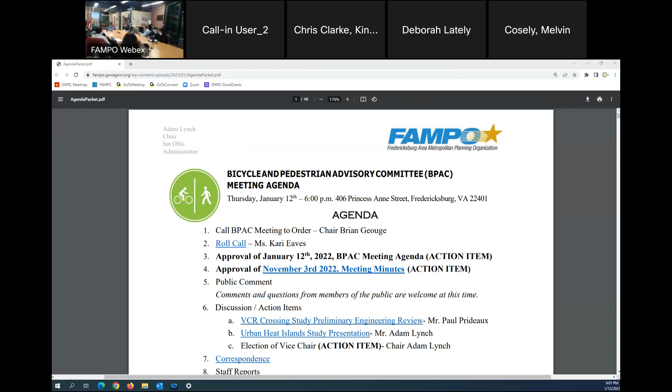Thank you, Brian. We have a token of our appreciation here on your way out. Thanks so much for doing your time as our chair. We'll miss you a lot, but glad to have Matthew here. This actually calls for a Kodak moment.

Get everybody else in the background. That won't be the only picture we get either. We need one with the certificate. I gotta get one. I can email this to you. Okay, thank you, please do. Put it on my face, please.

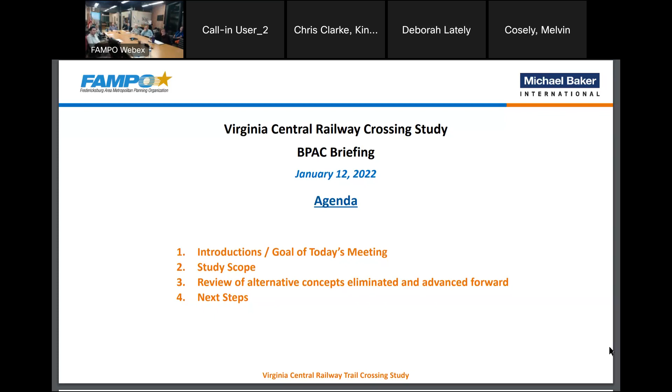So, Virginia Central Crossing Study. The goal of today's meeting - again, I work for a firm called Michael Baker International. We'll talk a little bit about the scope, just a slide or two. The really important part is review of alternative concepts, and then some next steps. Unless I hear any questions, I'm just going to keep going.

Just a little bit about the scope of work for those who haven't heard this already. It's a planning study - not final design, engineering, or construction. It's enough engineering, plan engineering is a cute word, to really get a handle on whether you can build it in 3 dimensions, and what kind of money we're talking about.

So for feasibility assessment, we looked at a number of alternatives at each of those 3 locations - we could go above, under, or other options. That's all in the rearview mirror now. Since then, working with the policy committee and the TAC, we have narrowed that down, but I'll talk a little bit about where we came from.

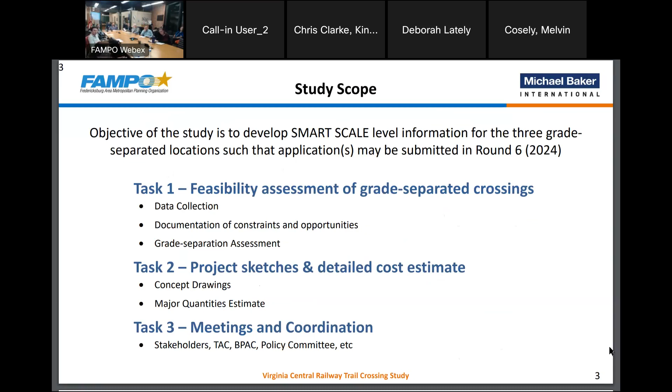We considered alternatives for each of those locations and picked a preferred option. The second goal, task 2, is to further develop those ideas - open the hood and figure out some things, but not enough detail that you could hand it to a contractor and say, build it. That's not the level of detail. And then here we are doing some meeting and coordination.

For example, at I-95 we looked at three things. We looked at maybe going over I-95 with an aerial crossing—those exist around the state and country, but you have to get up to them, and the lay of the land is quite below I-95 at this location, so it'd be a lot of getting up. So that was one option.

The second option was a tunnel under 95. A third option was using the box culvert—if you know what a box culvert is, it's made for drainage. There's this triple, massive box you can actually walk through. We did—we went out and walked through it and got a little splashing of water.

We thought about could we convert that to a pedestrian bike crossing? Converting the box culvert had too many issues, and the aerial crossing wasn't popular. So what you'll hear about tonight is the idea of tunneling—excavating, not an open cut, but boring under I-95.

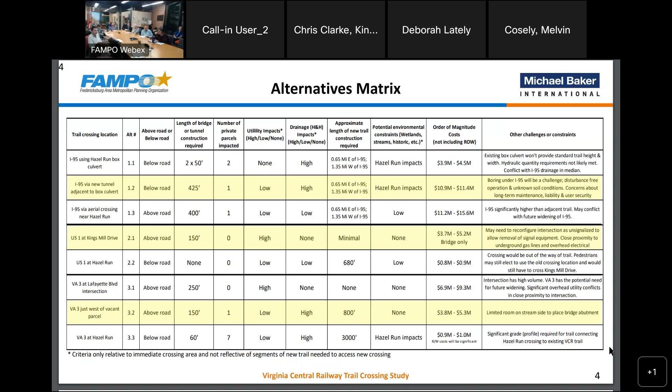So that's a lot of words, and no one wants words. Let's keep going—let's talk about 95 first.

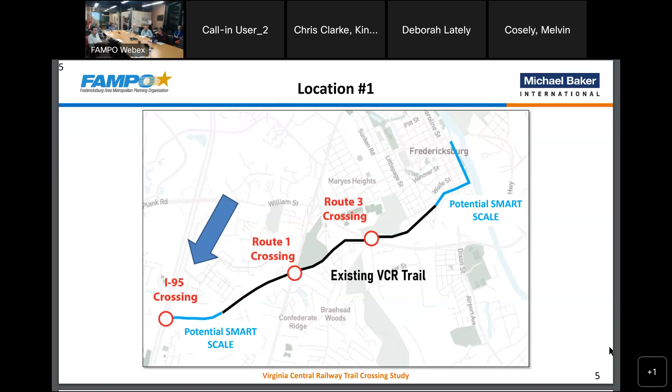Hey Paul, let me ask a question—often in these kinds of studies, one of the alternatives is to leave it as is, but your instructions took that off the table. That's a good point, that's like the no-build alternative. Yeah, in a typical environmental study you always have to have the no-build and carry it all the way through. This is a little more pointed—tell us what it would take. So you're right, my instructions were to go straight to that. That doesn't mean it's going to happen, it just means study these options. So we didn't spend any time investigating that, and this isn't really a study about demand—it's more an engineering study, like a three-dimensional 'can it fit, where do you put it, how does it work.' It's more of a practical question than a value question.

Question—maybe Kari can provide a little context. Was that applied for through a Smart Scale application? Yeah, the trail leading all the way up to the base of I-95 is part of that current application.

So yeah, there is an application to get to somewhere, but it's kind of a bridge to nowhere at this time. This ability to have a grade separated crossing becomes very important for that smart scale application to have value.

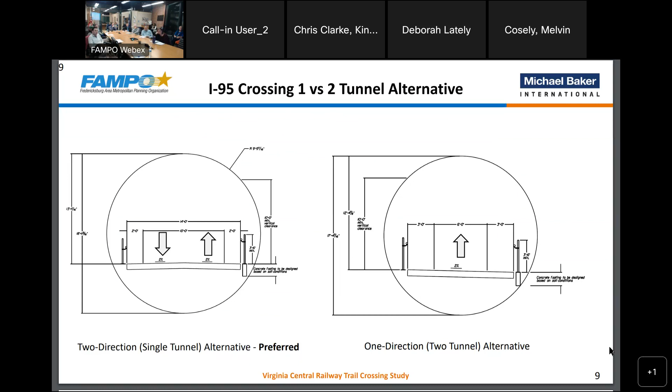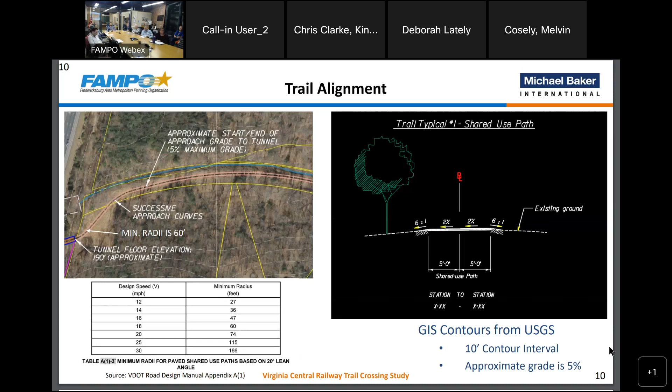Okay, that was it for that first one. I'm happy to keep going, and then when I'm all done with the other two, have questions - unless someone's burning to ask something, I'll just kind of roll on. Go ahead.

I was just going to add one quick comment - there was a question about whether there are other instances like this. There is a tunnel under I-81 at Harrisonburg that couples the east and west campuses of James Madison University. It's been there for a while. I wonder if that was retrofitted - 81's been there since the 60s or something, so it might have been retrofitted. That's the key, to build it after the interstate, as far as a precedent thing. I'll investigate - you're probably asking were the two campuses there before.

Certainly they were on the west side first, but I don't know about the housing, so I'll investigate. In fact, Melvin's on the phone, he's my tunnel expert. So Melvin, if you're listening, let's dig into that Harrisonburg crossing and find out about it. I think that's a great feel-good precedent thing, and that also gets at the security issue too, because obviously on a college campus, security is paramount. The plus there is there's a lot of traffic back and forth through the tunnel, and how much traffic we'd have here, I'm not sure, so we just have to look.

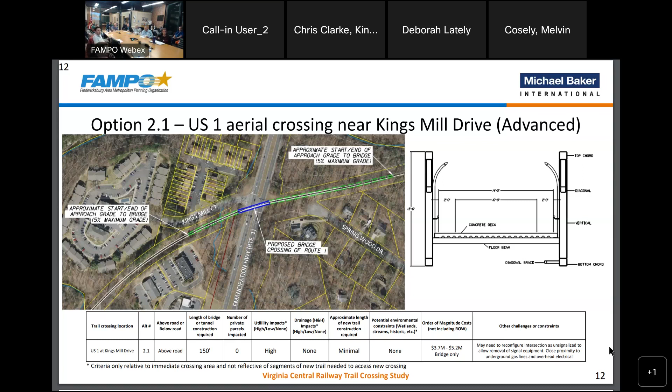So this is that intersection. Probably should have put this picture first, but here we are. This is the crossing that's there now. So use in your mind's eye, a bridge that goes up, up, up, up, up, down, down, down, down, down, right? That's the idea. The nice thing is the land kind of rises away as you go away from the road, so that's good for an engineer. You don't want to be chasing the grade, where you can never catch up if the land's falling away.

Some other good news about this: when I first saw this intersection, which I've seen for a decade, I said, oh my gosh, we've got a signal, we've got overhead utilities. That bridge is going to try to compete with all of that, and how are they all going to coexist? But then we got some great news talking to VDOT: this signal is only there for the trail. This intersection doesn't warrant a signal except for the trail. So if we build an overpass, a bridge, we can take the signal out.

VDOT probably will like that. Yeah, they're trying to get rid of signals. That's a win-win. They were happy to just take it out. That's great news, less maintenance for them. Still, there are overhead utilities that would have to be undergrounded for at least 200 feet or so. But that's a big deal, because before we learned that we could hang the signals on the bridges, I didn't like that — problem solved.

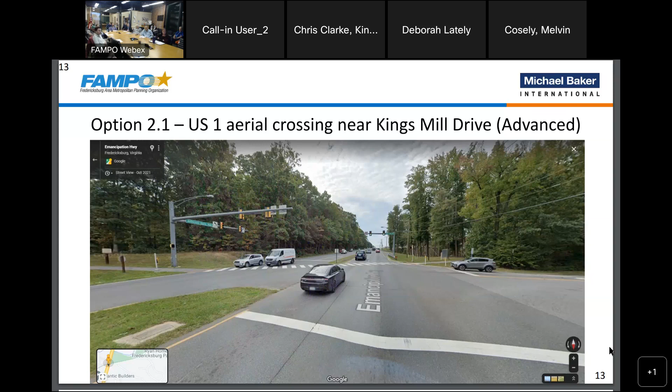Okay, I've got some fun pictures in a second, but just some thoughts that go into this idea, very in the weeds. It could be a pre-stressed concrete bridge or steel. This is about the span length. Signature structure — I put that in there because this could be treated like a gateway, and you could have a rustified steel bridge that looks brown and natural instead of industrial and military. But that's a question mark because that doesn't come for free.

Good news is we do not expect a pier in the median, because if you put a pier in the median, that lights up all these standards about protecting against hitting the pier, and you have to deal with the whole thing. So we came up with a concept that doesn't require a pier in the median — that's sometimes called a clear span.

Setbacks, I'll explain that in a second. Overhead utility conflicts, I mentioned that. Approach is elevated on either side, I mentioned that. And it has very little new trail construction compared to the other options at this location, because you're already in that alignment. So go to this next one.

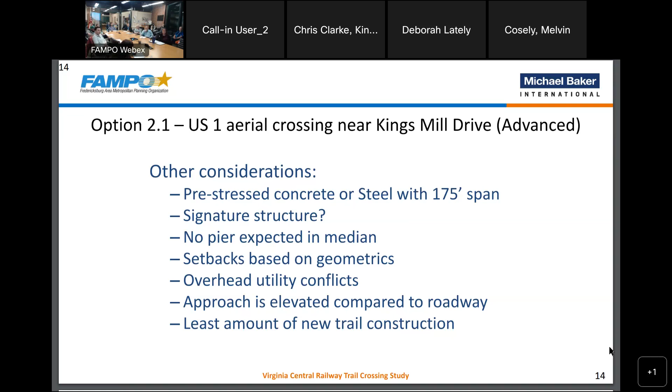One thing we thought about — this is my first thing — I said to my bridge engineer, who's on the phone, that he's not a traffic engineer. I said, hey, whenever you have a bridge, you have an abutment, right? Big, chunky, size of a bus, concrete thing, you can't see through it.

So I said to Melvin, we can't put the abutment somewhere where it blocks sight distance, because cars coming out of Kings Mill Drive won't have a signal to protect them. They need to be able to look uphill and wait for a gap. They're now at a stop sign situation, so no one's going to tell them it's time to go, you're green. They'll have to make that call. So we need to make sure this abutment is set back far enough so there wouldn't be a sight triangle problem, and we did that.

So there's a little graphic here about how much sight distance, how much space is needed, so he was very appreciative and laid it out accordingly. That's why this is a little further back than you might have thought it would stop.

So, in the weeds, more stuff about sight distance. Once we cross with the bridge, we're up in the air, so we have to get back down to grade. There are standards for this. You can't just dive like Snoopy straight down. You need a grade to get back that's no more than 5% for people's comfort in riding, running, walking. So it would take about this long to have a nice sloping grade, and it would just be built on fill.

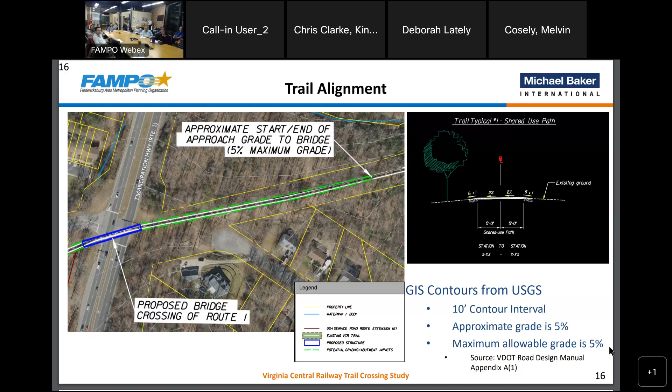So it happens to be a steel truss, so it could theoretically have a finish on it - they do this iron oxide finish sometimes that looks very natural. We wouldn't answer those types of questions at this smart scale level, but that allows the creative mind to go. Okay, that was it for that one.

And here's the fun one.

Before we head off of that one, Carrie, where is the new junior high school planned in relation to this? It's north, not in the same area. This wouldn't be much of a benefit for kids going and coming to school on either side. I don't think so. I don't think the city has many kids who walk to school anyway. Well, maybe it would if they could.

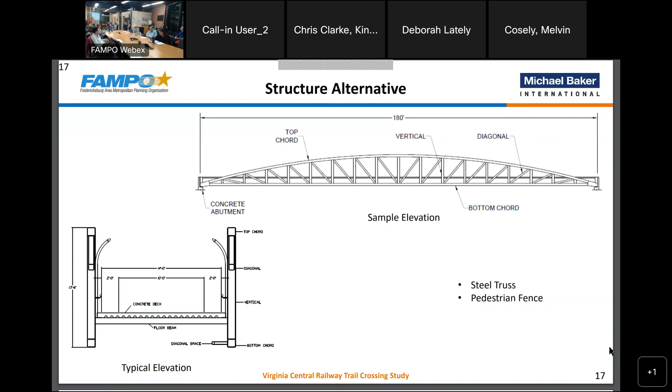Sorry, Stephen, yeah, it's not. I'm not familiar with that particular staff, just thinking of when we build bridges and you have that abutment come out. On the image you had on the northwest side crossing, there is a housing area. So how far out are they going to have to go west in order to get on that trail?

Because you're not going to be able to put a crosswalk at the intersection or anything else. And I don't know if there's any other developmental plans to the east of the road. Pretty sure, here's the community. Yeah, pretty sure it's right about here.

So it's not as far as this side, the way the land rises. I think it's pretty quick. So that idea of getting back, they would have to do this. That would actually help them because that community doesn't actually have any pedestrian connections technically to the existing trail. There's a dirt path that goes to the woods.

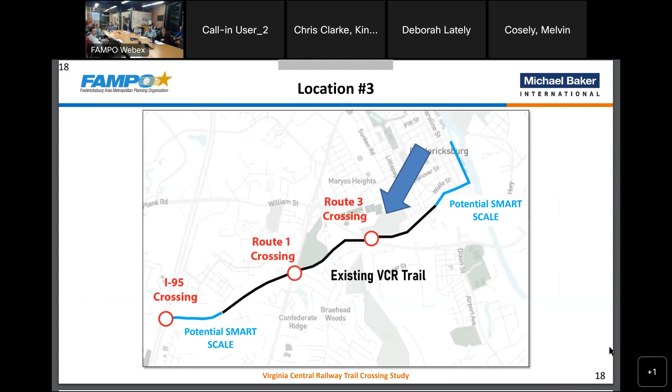Great, let's continue. Okay, so last location, so get your bearings, we're here tonight, right?

So the policy committee and tech said, let's not try to go over here and cross under this bridge. Let's focus on crossing around here, aerial overhead bridge. And they said, but could you dig into it a little bit more and say, is it better to cross here or maybe here? Here or here? But the point is right under my hand, it's where they wanted to.

So we threw out the idea of going way over here because it felt like there were a bunch of problems. So even though this particular drawing shows one of them in a slide or so, you'll see the two options. This happens to be one option. Let me just look at what's interesting here. So it'd be a bridge over Blue and Gray Parkway.

It would land over here, right about here. This is that parcel—if any of you drive around there, it's vacant right now. I don't actually know the status of the developer, but when we were out there it was vacant, still vacant tonight. But that would require some kind of easement or proffering to sneak into part of their land, or maybe it's here.

If this landowner is more cooperative, that can be worked out. It could be here, or here. The point is we would get over here and then reconnect to the existing trail, because by the way, this is an existing trail. That was supposed to be a Royal Farms, which was ultimately declined by city council. I don't know who's got it there.

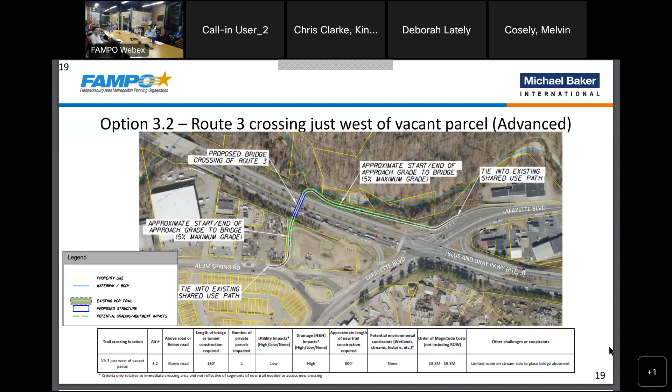This bridge has a certain length. The answer is this bridge would have to be longer—because that's a mess, it's awful. So here are truly the two options. This is the same one again, this happens to be this location—let's call it A. There's no reason behind A or B or 1 or 2. This is the same one we just looked at, call it A. The other one is this.

Some pros of this one: less deviation, people are used to doing this. Less deviation from what you can see—where you want to be. I want to be over there, I'm going over here, but I want to be over there. It's a little weird, but it's not that long—it's not like it's a mile. But the problem with this one is that the bridge is 25% longer or something, and the extra cost of that more than outweighs the lower cost of the at-grade trail.

There's also a little concern here about—back to that thing about piers and sight distance—it's a little ambitious and maybe risky to put a bike path right on top of the intersection. If that intersection ever needs to be widened, or a left turn lane added, all of a sudden you'd have to move the bridge. So we kind of like getting away from it a little bit.

So our preference is go ahead. Now, I know this part looks like it's mostly within existing VDOT right of way, but it abuts the National Park Service and the battlefield property—it looks like it would go right up to that line. Have you guys had any conversations with them regarding that, and what they might say?

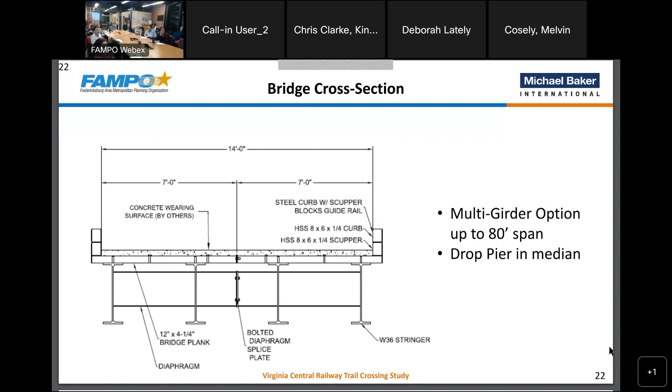Drop pier in the median.

This requires easement negotiation with site development, I said this earlier. It's the first thing I mentioned when we started talking about this alignment. There's limited room for a bridge abutment on the north side, which I mentioned, where you have to get off the bridge and turn pretty quickly because of the run. So we're going to talk to VDOT about this in two weeks, to hear them say once and for all whether there's any plan to widen Route 3 in 20 years or so. Not that they'd know, but I want to hear what they say, and we might set the abutments out farther. I don't know what they'll say, but it's free to ask. I don't think they'd have any plan we wouldn't know about. We would know if there was a long range vision plan. It's not in the foundational documents of the city, for sure. So I just want to see them squirm a little bit and see what they say.

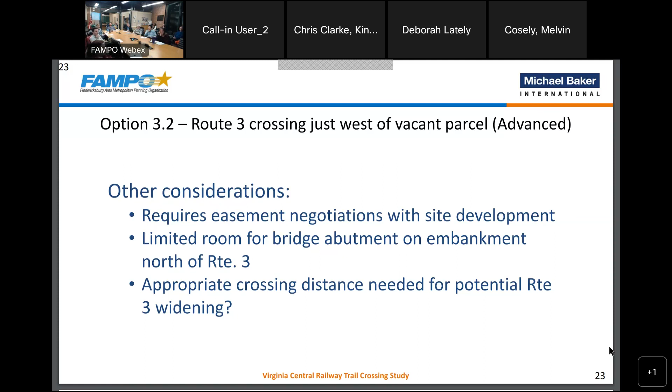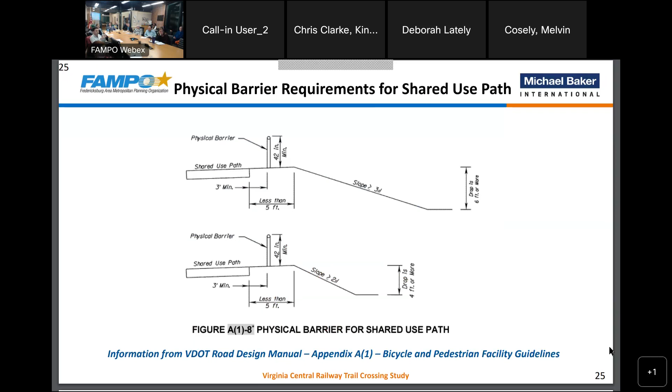That's the same thing you've seen before on a trail, typical kind of thing. But here's a little extra thing that's different for this one. If you have a trail built in a cornfield, you can do that. But if you have a trail built near a drop-off, you're required to have physical barriers so kids don't fall down and roll down the hill and hurt themselves. Since Hazel Run on the north side is right there, there'd probably need to be some extra punch list item for construction.

Okay, we're done. So we'll hear any comments you have tonight or after tonight, and we'll respond to your questions or comments. There's a technical briefing coming up where we'll see this in more detail - that's the one we've been talking about. I forget the exact date, but it's coming up soon. We'll do something like this with them. They've seen all this, but they haven't seen this level of detail. I've gone deeper since we last talked to them.

And there's that question about Route 3. So where this is all going, I don't think VDOT's going to say cease and desist, never speak of alternative 2 again or whatever. I don't think they will, but they ultimately control smart scale and everything, so they know that. But where this is headed is this year we're going to drive these things all the way to ground. If FAMPO wants us to, we'll stand up 3 applications, or maybe they say let's just do 1 this round, the next round of smart scale next year, or maybe we do 2. I don't know, they haven't even decided that yet. As much as they want, we will stand up to 3 applications and they can decide what to do with them. That's where this is headed this year.

So when do projects need to be submitted to smart scale for round 6? What's the due date for that? July 2024, August 1st - do you think they're going to move the date? For a long time it's been August 1st, which means... yeah, it's usually August. Sorry, I still didn't catch that. Pre-applications start in early 2024 and then the very end is August 1st. It'll be in 2024 because it's a 2-year cycle. But what happens is you have to start turning in early concepts months before and get in the queue, so it's really more like spring. Yeah, it takes like 18 months to really develop something. You're looking at like a year from now when you actually need to say yes, we are applying for this project. Yes, I agree with that.

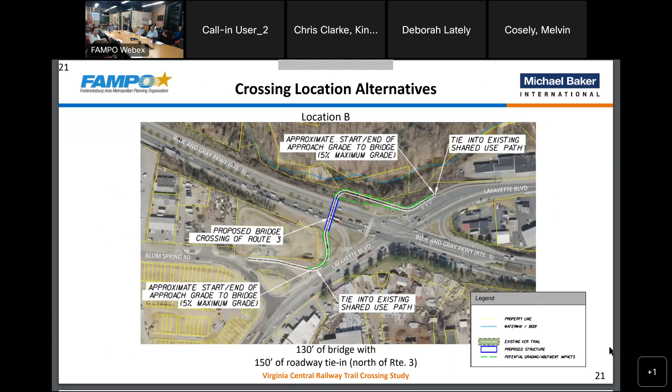Well, thank you, great. I had a question about the 95 tunnel - how far west of 95 does the VCR trail extend? West, there's nothing there now.

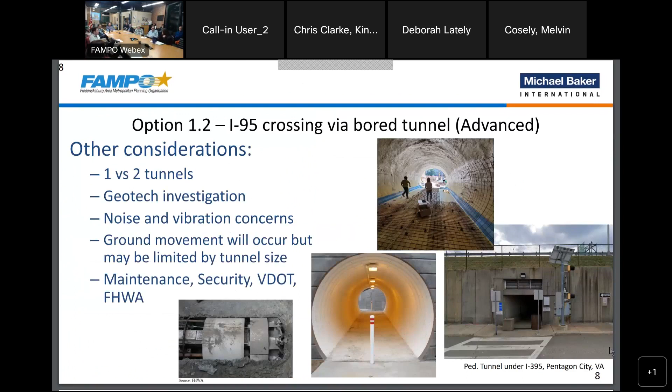I think the rail bed - there are bits and pieces, rail bed to Harrison Road. It's all feasible to properly extend that trail. The actual paved portion in Spotsylvania County right now starts at Salem.

There's a gap between I-95 and Salem Church Road. Salem Church Road all the way forward - it's actually CIP money, believe it or not. They're resurfacing it, if it hasn't already been done, I think it's happening next year - resurfacing that whole trail. I've brought this up in the past - our number one priority for the VCR trail is trying to close that gap between Salem Church and I-95.

We have approved funding. You're familiar with the way the VCR trail terminates right now at Salem Church Road - it literally terminates inside of Salem Church Road, not at an intersection, literally mid-block, just dead ends there. So after years of discussing this, the other problem is the trail - the rail bed falls off on the other side of Salem Church Road. There's a big topo issue there.

And after years of going back and forth through BPAC and talking with BPAC, the determination was made that the most advantageous crossing for that is at the signalized intersection of Salem Church Road and Harrison Road. Fortunately, the county has a public park there at the corner, Harrison Road Park. It's actually a former landfill site, which ultimately elevated the cost of doing this, but we have funding in place to extend the VCR trail up through Harrison Road Park and then up alongside Salem Church Road to the intersection.

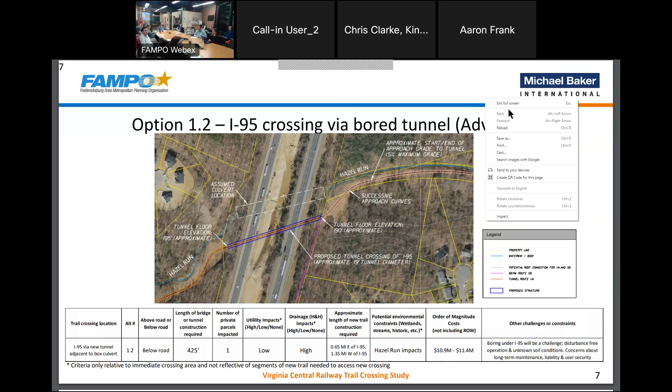About a year ago, Friends of the Rappahannock started working with GWRC to begin an urban heat island study, and ended up partnering our two organizations to do a study of urban heat island in the GWRC PD 16 region.

This topic goes back to one of the great issues of continuing to build around the personal vehicle. That challenge is we are making our urban areas hotter when we build large parking lots, and there are environmental impacts and social impacts to that.

So this study looked at some of those impacts. For those who aren't familiar with the concept, an urban heat island is an area with a high concentration of impervious surfaces that absorbs and traps heat. In a more natural environment, plants and natural settings tend to reflect more sunlight, or they absorb it and use it for energy. But places like parking lots and sidewalks tend to absorb it and then re-emit it, which raises your local temperatures.

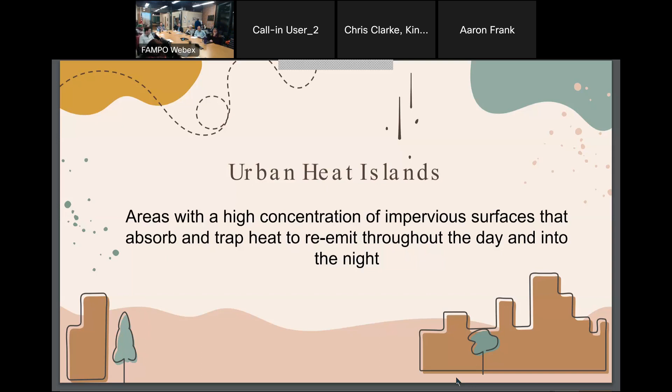What we did was Friends of the Rappahannock worked with GWRC and also Mary Washington to use a combination of GIS analysis, remote sensing analysis, and field data to estimate what a typical forest versus a typical urban area has in its ambient temperature on a hot day. We worked through these steps using one of our GIS analysts, in-house at Friends of the Rappahannock, as the primary analyst of this study.

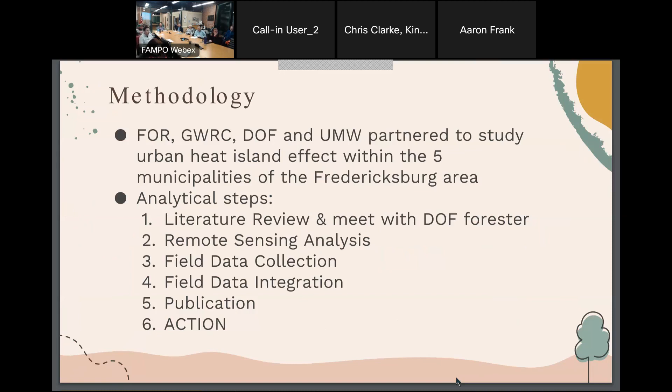We did our field sampling on a hot day, July 10th. We had 37 volunteers from Friends of the Rappahannock walking around with handheld thermometers taking data down. We had 20 different sites throughout the 5 municipalities.

After plugging in our field data and using that to calibrate a GIS model we use to model land cover, this was our result. The peak temperature was approximately 17 degrees on a typical hot day of the year, hotter than a nearby natural forest setting. That was a good data point for us and roughly lines up with what other studies have found in urban heat island areas.

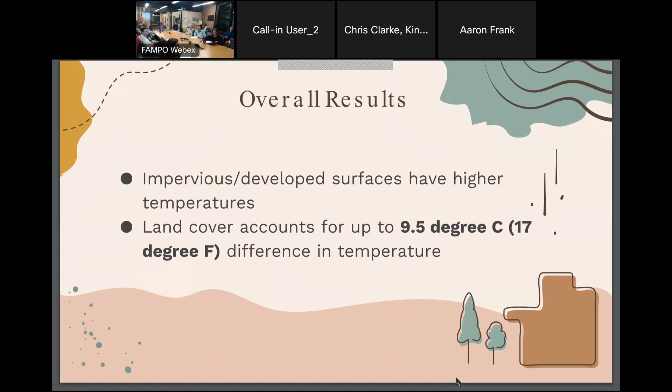So where we're going to try to take this moving forward is in our water quality field, we'll potentially look at the effect of heat islands on thermal pollution, but also stepping back to how this plugs into BPAC's mission: we need to consider the wisdom of continuing to build large parking lots and low density, car-dependent societies, because it is affecting our health and our environment in many ways.

Over time, we would seek to, if not reduce our impervious surface, make more efficient use of it by increasing density and transitioning to transportation forms that better serve dense communities, like biking and pedestrian infrastructure.

There are some other things you can do to retrofit your heat islands. One of them is increasing tree canopy. So FOR has been working with the city of Fredericksburg recently to consider an ordinance that would require up to 20% of development sites to be in forest canopy.

That was the General Assembly enabling ordinance passed in 2022. And the city's Clean and Green Commission just supported that ordinance at its last meeting earlier this week. So we are hopeful the city will bring that through its planning team and it'll end up becoming an ordinance for the city.

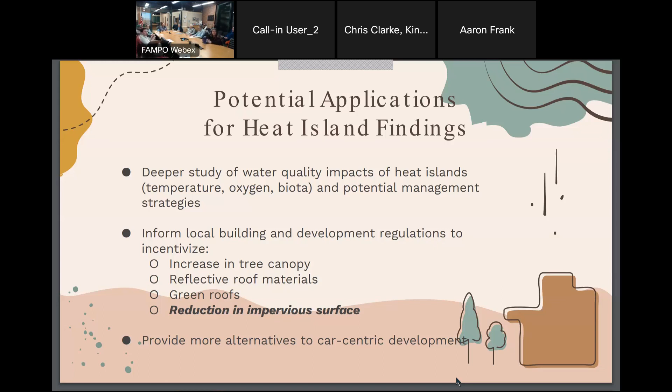Yeah, and I think it might just be a factor of age. I think they probably scraped those sites clean back in the 50s too, but it's just been so much time that those trees have gotten big and mature.

But requiring more trees from the start means you're getting ahead of the game. I think there's a lot of reasons why developers regrade so significantly. Stormwater regulations aren't ignorant to that fact, but I wish there were something pushing back on it, requiring that certain amounts of landscaping and trees be planted at every new development.

Stuff like I'd also like to see it be easier for developers to claim tree conservation as a stormwater BMP, which they can't really do well now. You might know better than I would, but it's more like there's just more bang for your buck to clear out the trees and build a stormwater pond in many cases.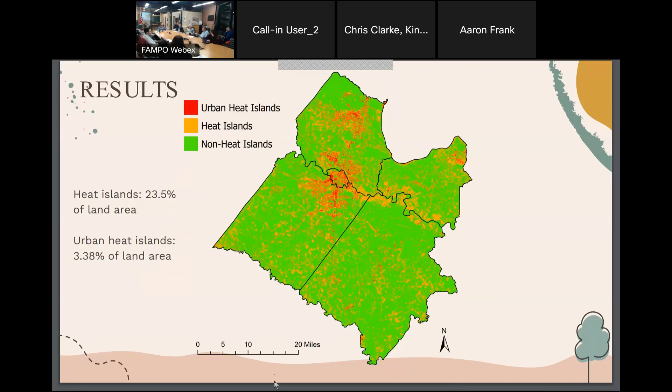It's interesting to note that the eastern counties here in King George and Caroline County seem to be very cool. My immediate thought is, what should we be doing with our local ordinances to keep it that way? Well, my first thought is continue to try to prevent too much urban sprawl from coming out into your counties. Some of the most severe heat islands are in suburban environments, and Spotsylvania, Stafford and Fredericksburg should continue to follow smart growth principles and preserve rural places in those outer counties. I think that's the way forward.

Locally, you guys could certainly benefit from things like requirements to build tree canopy in as well. A lot of our land is tree covered, we're just one woods from one end to the other, so ordinances should encourage keeping that tree cover rather than clearing it and trying to replant.

Right, we've got to find ways to incentivize that. Another thing that comes to mind is in Stafford, I don't know how it is in Spotsy or the city, but we have minimum parking requirements. We don't have maximums. Some localities have that. It doesn't stop people from coming in and building big box retail for Black Friday, and the rest of the year it's three-quarters empty.

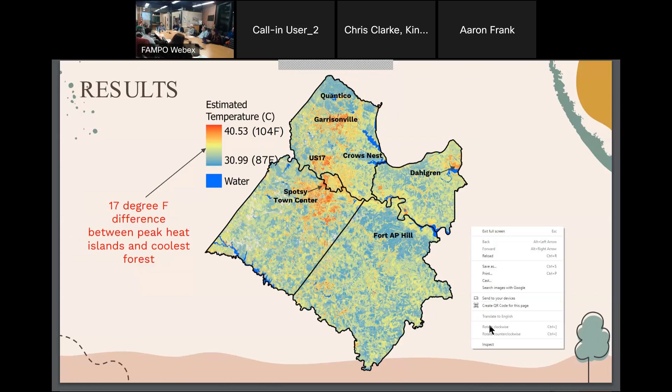The Silvers, basically. Yeah, that's who.

Okay, yeah, all right. Well, hey Adam, this is Aaron Frank. Just want to add a quick comment, nice presentation, that was really good.

I actually participated as one of the data collectors for the heat island data in the city. As we all know, in order to get that data, it means you've got to be out there at 3 p.m. on the hottest day of the year, and we did it by bicycle in the city, which makes for a pretty hot ride. I just wanted to underscore for this group that it really does have a significant human impact on active transportation users. Within the city in particular, in addition to the environmental impact, we look at shaded bus stops and where non-vehicular users will be traveling, and that really takes a physical toll. So I'm glad you brought this to this group.

Yeah, that's an awesome point, Aaron, thanks for bringing that up. Glad you could make the meeting.

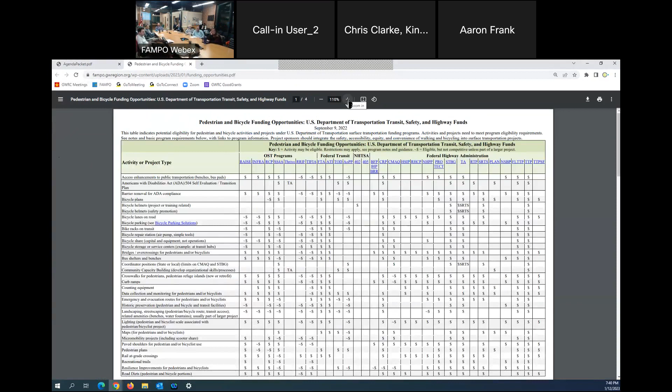All right, correspondence. So I just put this in your correspondence, so you would have it as a source of information. This is for our locality reps, folks who are getting ready to put forth various funding applications. These are just funding sources for your various projects. Just have it in your pack to peruse at your leisure.

Very brief thought, maybe I'm not sure if this is something we've done in the past, but maybe it'd be cool to have a guest speaker, either from FHWA or VDOT, to brief and talk about various funding programs that are available to them. That's a great idea. Already giving us good ideas. Yeah, we could do that. We have a new FHWA person, so maybe we could rope them into coming to visit us.

Eric, just a question. Is there a similar kind of table out there that you're aware of for state funding sources, through like DCR and some of these other more recreational trail organizations? I have looked up those things and pulled them into various documents I've done, but I haven't seen a specific table.

I find the funding, all these millions of pots, to be confusing. Confusing, me too. Is it really that? I mean, it's these little tiny pots of money all over with their own application. I don't find it to be very efficient. I know, you can't get some of these large scale projects that we discussed done through those means. So it's a gripe, that's all. That's a gripe I share with you.